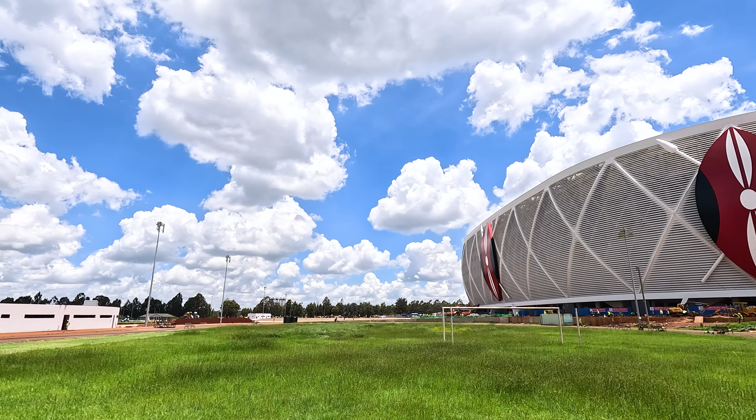I can see a lot of progress since the last time we were here. You can see caterpillars, the heavy works.

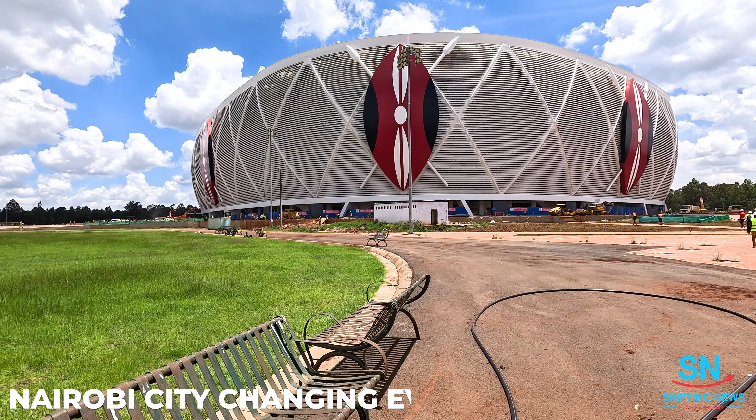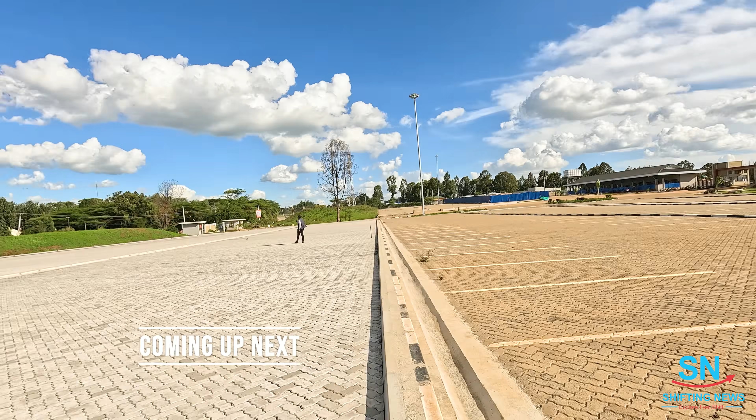Or there will be shops. I don't know, not sure if those will be shops. Shifting News. Explore, feel, shift. One of the most modern facilities in this region, the Eastern African region.

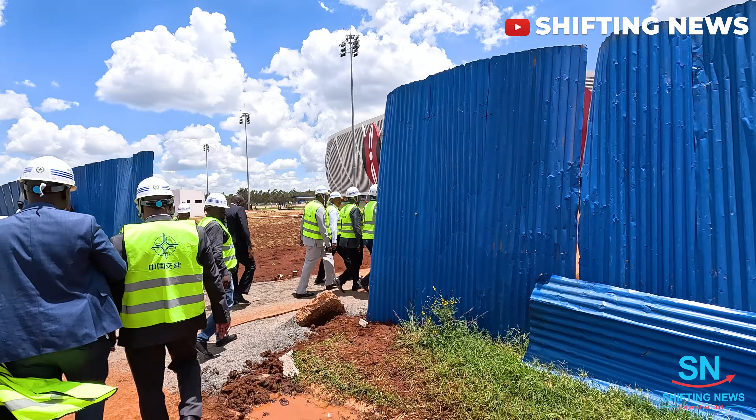On the outside an inspection is happening and we are just here to check on the updates. Wow, see here, hey, this is immense progress.

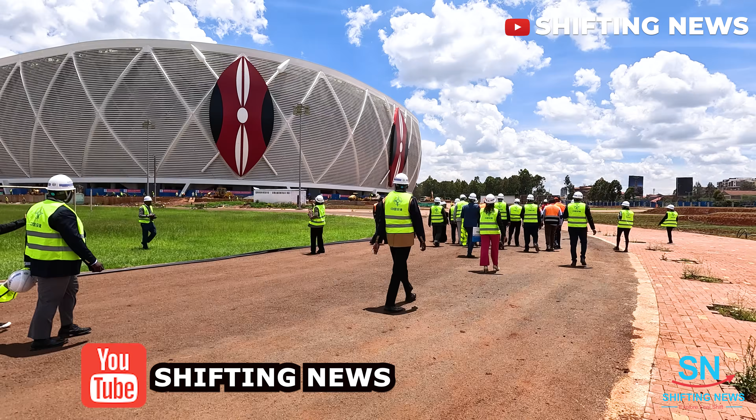So today we were supposed to have the meeting of the CS being questioned, but I think he was not able to make it. And you can see this is the way I'm dressed.

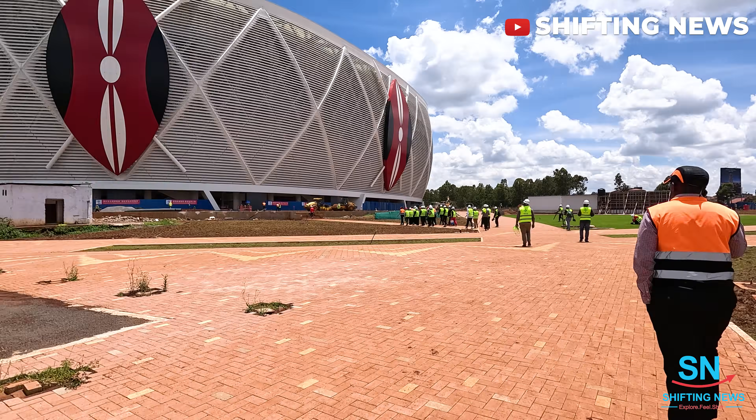And you can see the senators and different committee members. They are ready to inspect the field, and you can see cabros, walkways, and guys, I'm here with...

Yeah, this is now the Talanta Stadium, one of the most modern facilities in this region, the Eastern African region. A 60,000-seater, magnificent, gigantic stadium. Everything will be included in this stadium, everything modern.

Like now outside we are going to have an athletics stadium where they will train and also feel part of the Talanta City now. Oh wow, okay, yes, because now inside there we are only going to have football and rugby.

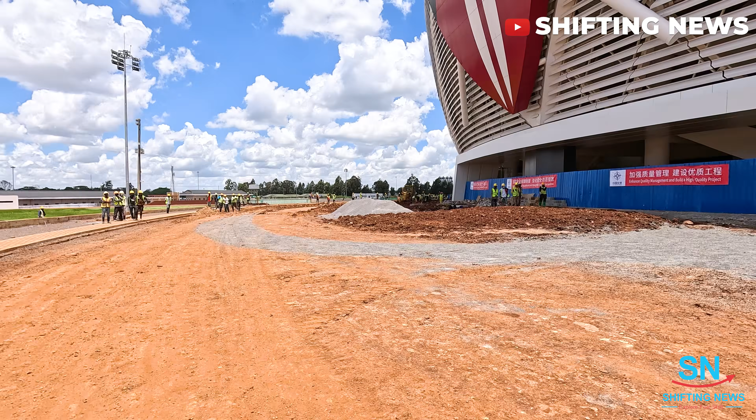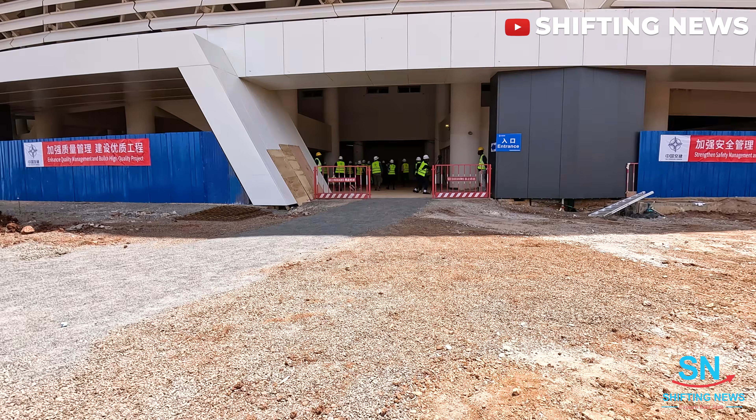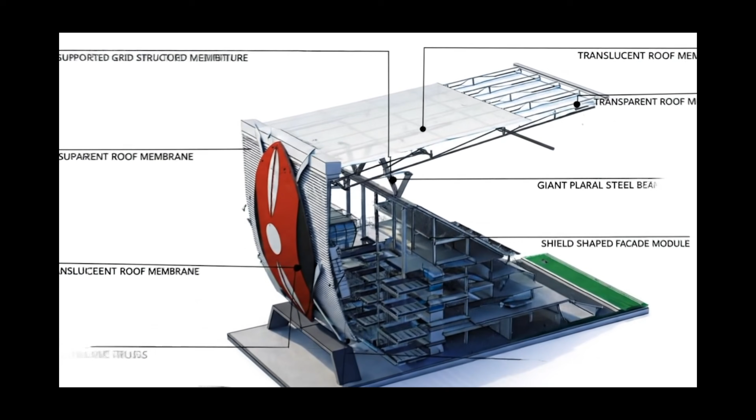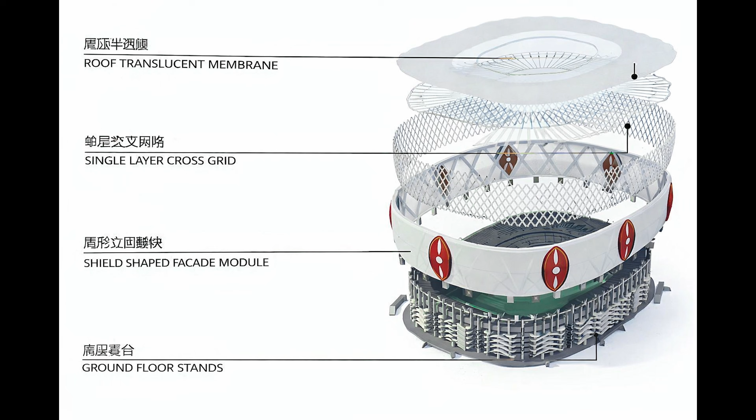To all our supporters, the experts in the house, professionals, engineers, architects, and various positions, let me say this: I'm not an expert, I'm not an architect, I'm not an engineer. I'm just a person who is interested in travel and infrastructure developments happening in our country. So whenever we are doing this, we don't have that core information. Otherwise, what you saw me wearing is just the helmet and the reflector, just for this purpose. And the helmet is good.

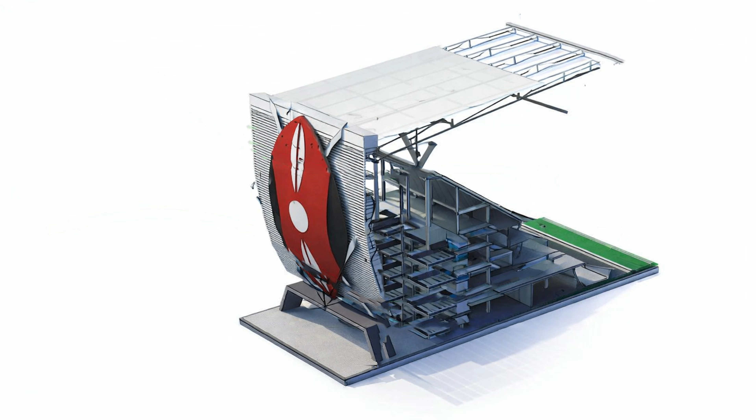You know, I can get in the middle of the Talanta Stadium, and you realize that Senegal may have decided let them throw the cup, and it comes to land in Talanta Stadium, and maybe it finds me in the middle of the stadium. So I hope it can land on the helmet and my head will be safe.

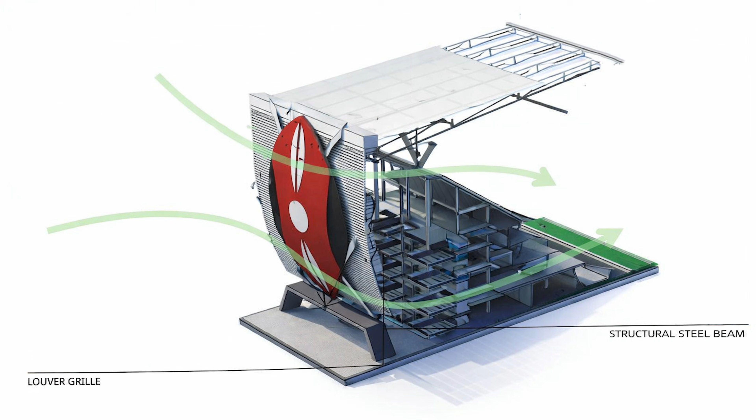Anyway, to understand why this is a generational project, we have to look at the engineering under the hood. The Talanta Stadium is not just a concrete bowl. It's a masterclass in modern sports architecture. The exterior is defined by these shield-shaped facade modules, a direct nod to the Kenyan flag and Maasai heritage.

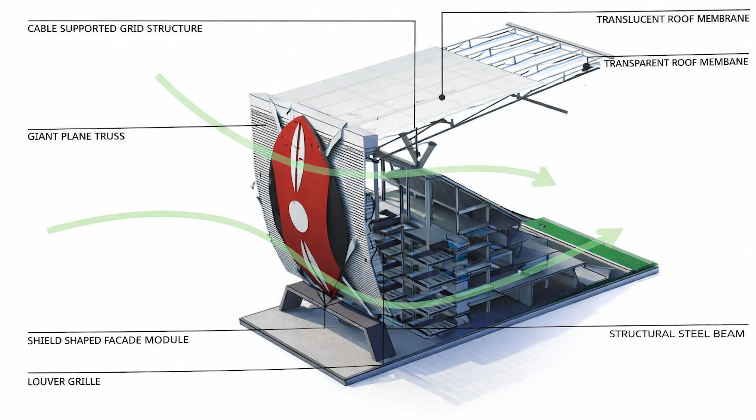But look closer at the roofing system. Probably we may be seeing a sophisticated cable-supported grid structure using both translucent and transparent membranes. This allows maximum natural light onto the pitch while protecting 60,000 fans from the elements. The entire structure is anchored by giant steel beams and a plane truss system designed for long-term durability and that iconic floating look. Efficiency is the name of the game at Jamhuri grounds.

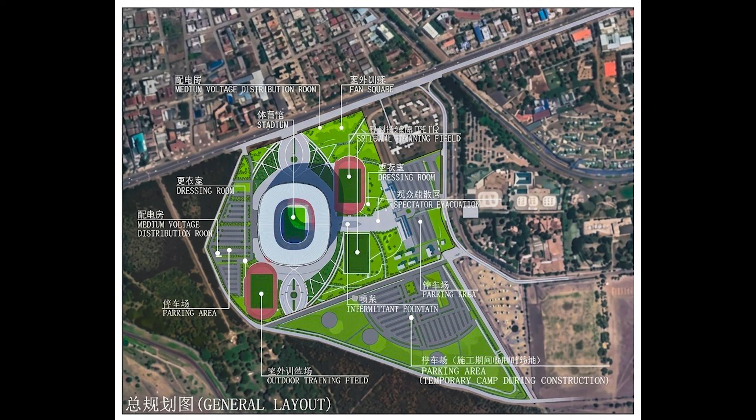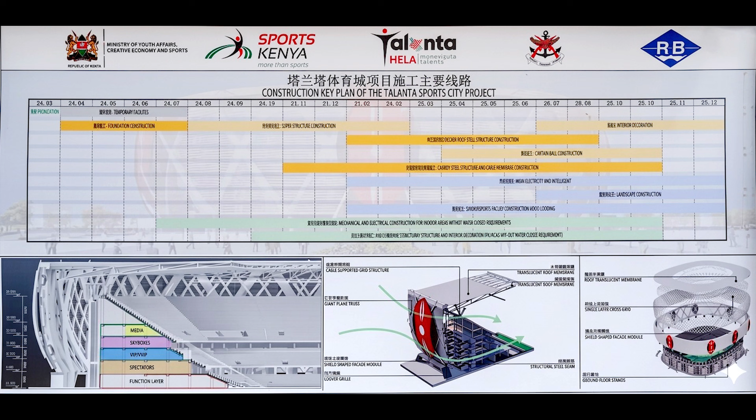We are hoping so. The master plan reveals a massive 45-hectare footprint. Beyond the main 60,000-seater arena, the city includes dedicated training fields with high-quality outdoor pitches for teams to warm up. We have a spectator flow with extensive evacuation areas and a dedicated fan square with intermittent fountains. And we also have logistics, that is a medium voltage distribution room and parking for over 3,000 vehicles, ensuring the stadium remains tech-savvy and accessible.

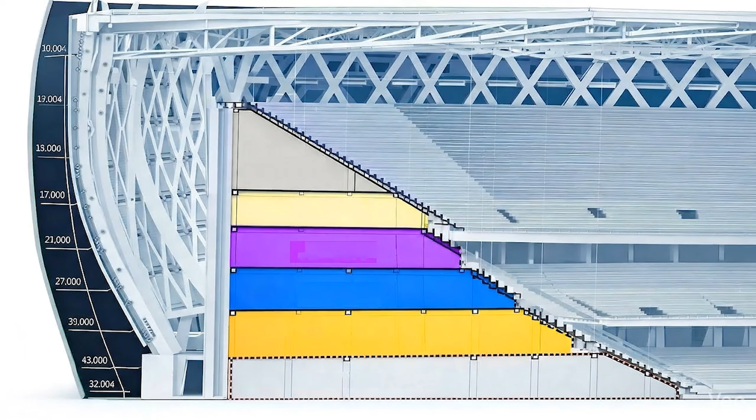One thing you'll notice is the compact design. There is no athletics track, which brings the fans right to the edge of the action. The seating is cleverly tiered. The ground tier for the core fans, creating the 12th man atmosphere.

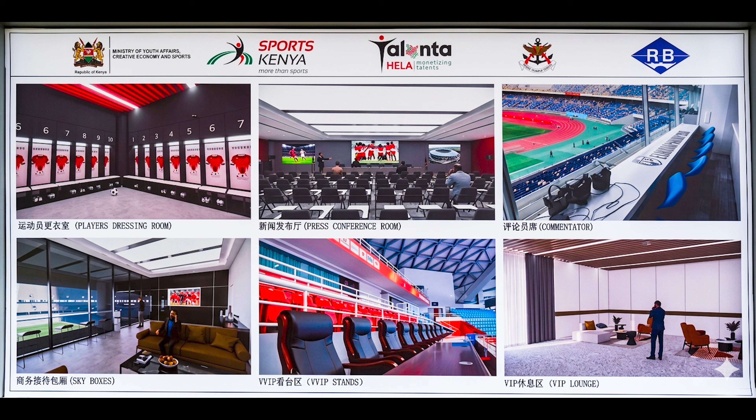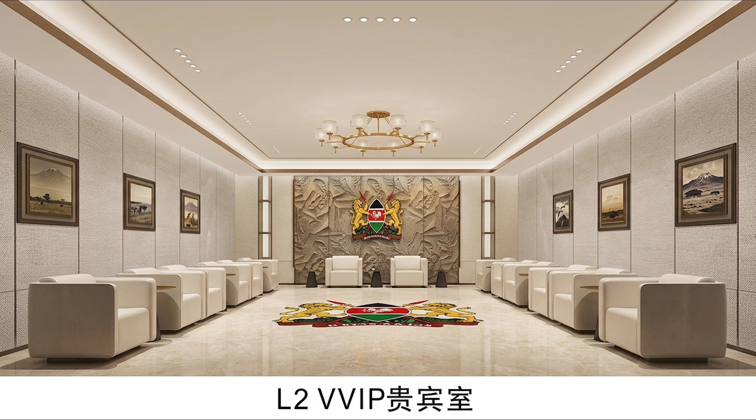Inside, the focus is on the athletes and the media. Athletes here, we say the sports people. So we are looking at 6 state-of-the-art changing rooms, a dedicated VAR control room, and doping control stations. The players' dressing rooms are spacious and modern, designed for peak performance. For the global audience, the press conference room and media suites are equipped for 4K live broadcasts, ensuring Kenya's story is told in the highest quality to the rest of the world.

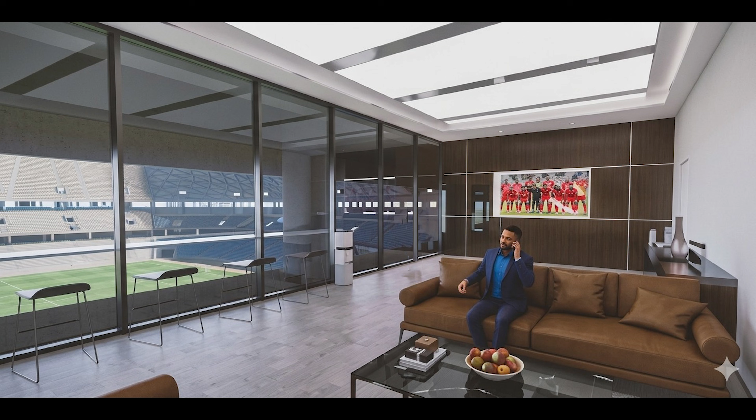As we race toward completion, it's clear that Talanta Sports City is more than just a stadium. It's a landmark of national pride and a fortress for the Harambee Stars. Let's all enjoy.

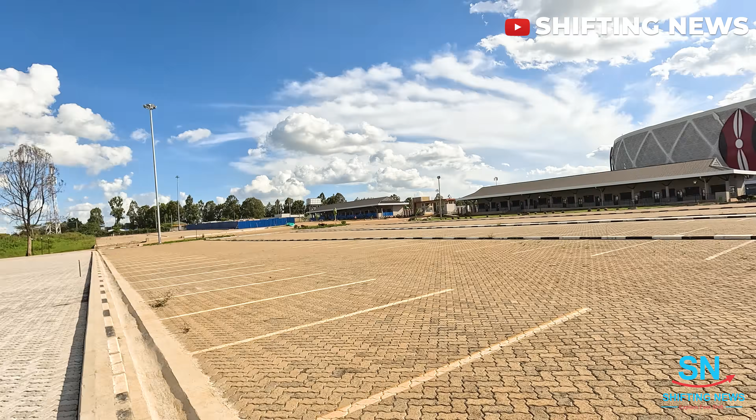I'm not sure if those will be shops. Don't worry yourself, you have somewhere to park.

And we also have another parking area on that side, and inside there, where you see the blue mabatis, we have a section where they have stored the seats that are supposed to be installed in the stadium. Wow.

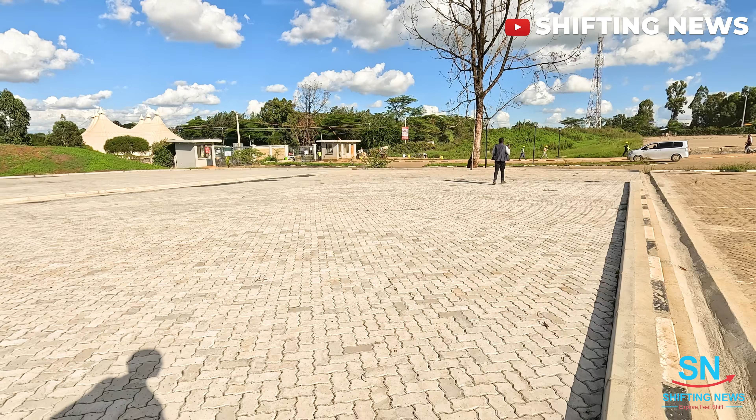So you can see we have another parking on that area. Then on the other side we have a police station.